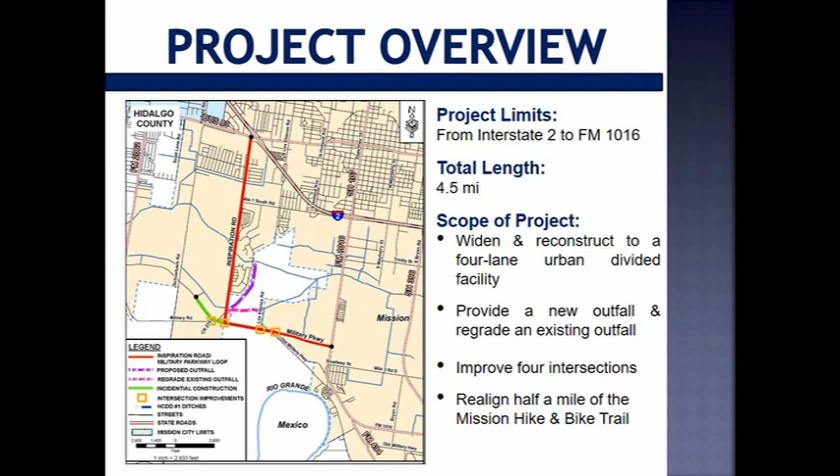Then east along Military Parkway to FM 1016, a length of 4.5 miles. The scope of the proposed project includes reconstructing and widening the existing roadway to provide a 4-lane divided urban facility, providing a new outfall and regrading an existing outfall to improve roadway drainage, improving 4 intersections, and realigning half a mile of the Mission hike and bike trail.

The existing conditions of the roadway cannot accommodate the current and projected traffic volumes. The roadway has design restrictions including bottlenecks due to varying lane and right-of-way widths, a lack of adequate turning bays to accommodate vehicles turning into existing residences and businesses, and tight turning movements at intersections.

The roadway contains gaps in the local transportation network. Inspiration Road from Mile 3 North Road south to I-2, US 83, has been reconstructed to provide a continuous north-south 4-lane corridor, and the Inspiration Road I-2 intersection was renovated to improve mobility. The proposed project would complete this vital north-south corridor within the city of Mission.

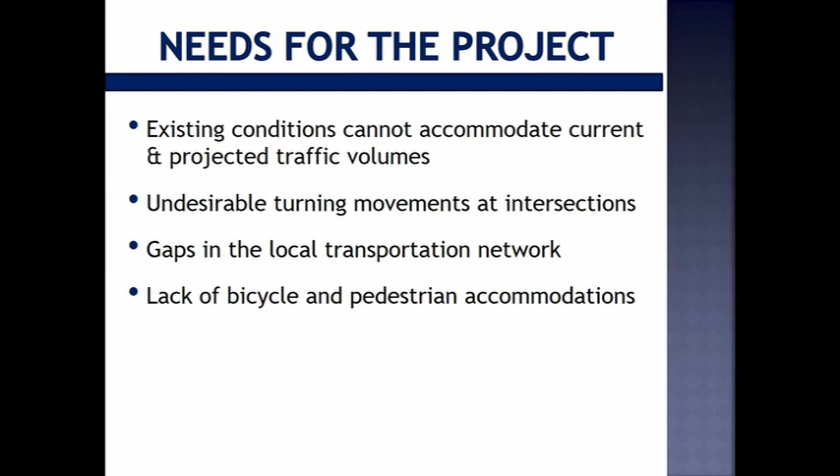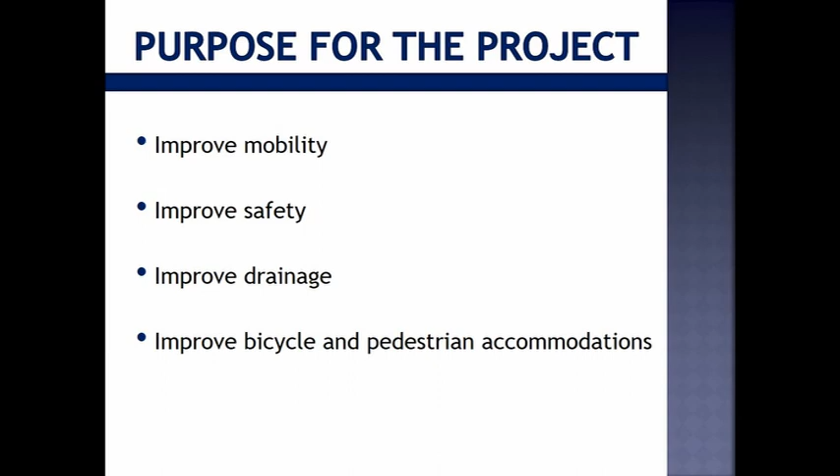Despite the presence of city parks, residences, and a hike and bike trail, the roadway does not provide pedestrian or bicycle accommodations. Bicyclists were observed on Inspiration Road during field surveys. The purpose of the proposed project is to improve mobility, safety, drainage, and to enhance bicycle and pedestrian transportation.

The increase in population and ongoing development have resulted in high traffic volumes in the project area. The traffic data is based on the average daily traffic, ADT, for the years 2020 and 2040, and divided into sections as follows. For the section of Inspiration Road between I-2 and 1 Mile South Road, the average daily traffic for the year 2020 is projected to be at

12,017 vehicles and 35,286 in 2040. Between 1 Mile South Road and Military Parkway, the average daily traffic is projected to be 1,108 vehicles in 2020 and 5,207 in 2040.

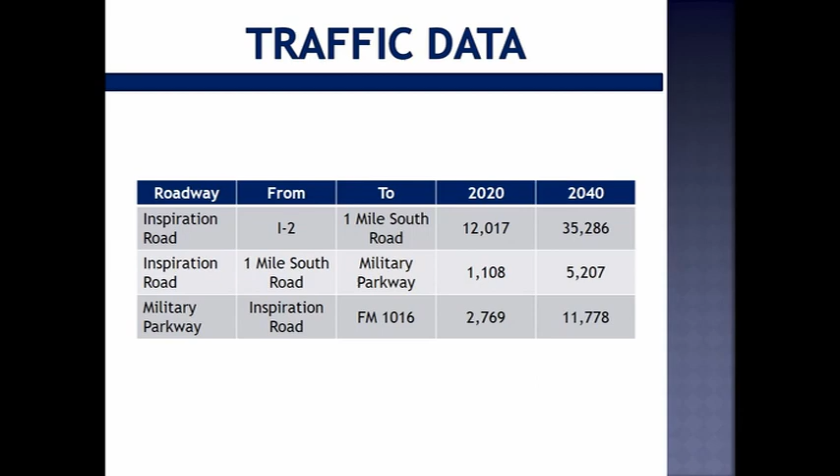And for the section of Military Parkway between Inspiration Road and FM 1016, the average daily traffic is projected to be 2,769 vehicles in 2020 and 11,778 vehicles in 2040. Two alternatives were studied and considered for this project: the no-build and the build alternative.

Under the no-build alternative, the existing roadway would not be widened or reconstructed. The existing conditions of the roadway would remain, and no improvements would be made to intersections or drainage. The no-build alternative is not recommended because it would not meet the need and purpose of the project. However, it is carried forward as a baseline.

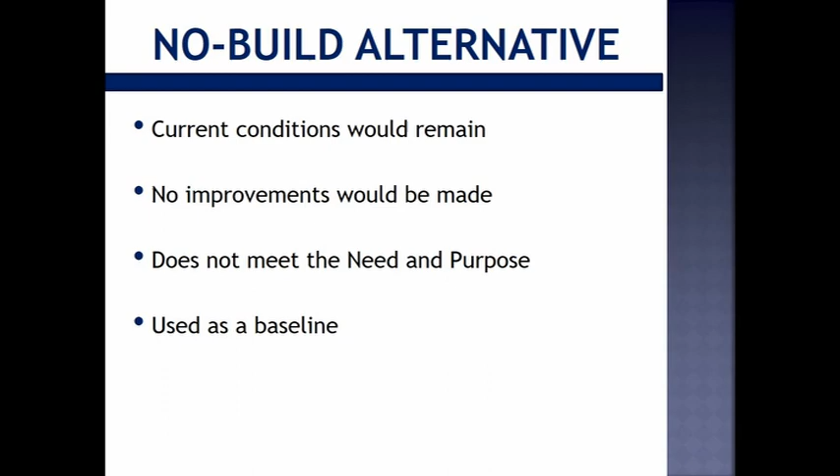Under the build alternative, the existing roadway would be widened and reconstructed to 4 travel lanes, a continuous left turn lane, shoulders or a shared use lane, and sidewalks. A storm drain system would be installed along with an outfall to drain storm water runoff from the roadway. 3 existing intersections would be realigned along Military Parkway, and the Los Ébanos Road intersection would be improved.

This alternative would require a total of 39 acres of new right-of-way. 7.7 acres are along Inspiration Road. 9.6 acres are along Military Parkway. 19.7 acres are for the new outfall, and 2 acres for County Road 2791 intersection realignment.

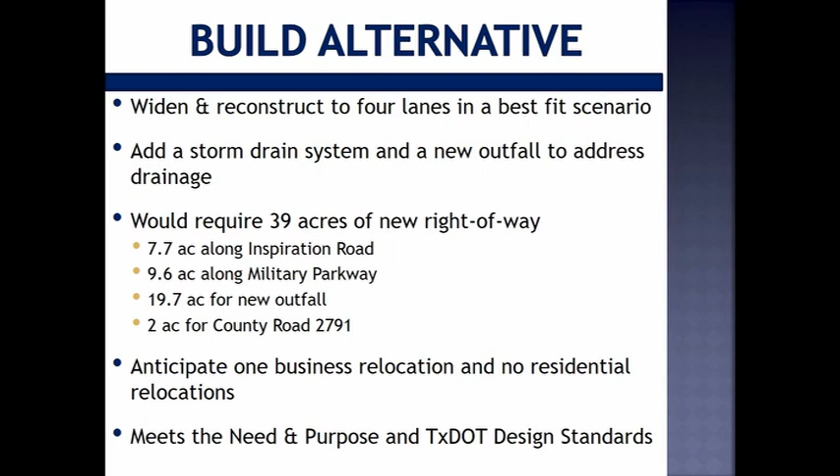It is anticipated that 1 business relocation would be required. No residential relocations are anticipated. This alternative would meet the need and purpose of the proposed project and would meet or exceed current TxDOT design standards.

Along Inspiration Road, the existing travel lane configurations are variable, as shown on the screen. Most of Inspiration Road is a 2-lane rural roadway consisting of 2, 12 to 14 foot wide travel lanes and intermittent 8-foot wide shoulders within a varying 60 to 140 foot wide right-of-way. There are areas where the roadway is wider to provide turning lanes for vehicles entering subdivisions or the Rio Grande Valley State Cemetery. Drainage is currently handled by roadside ditches.

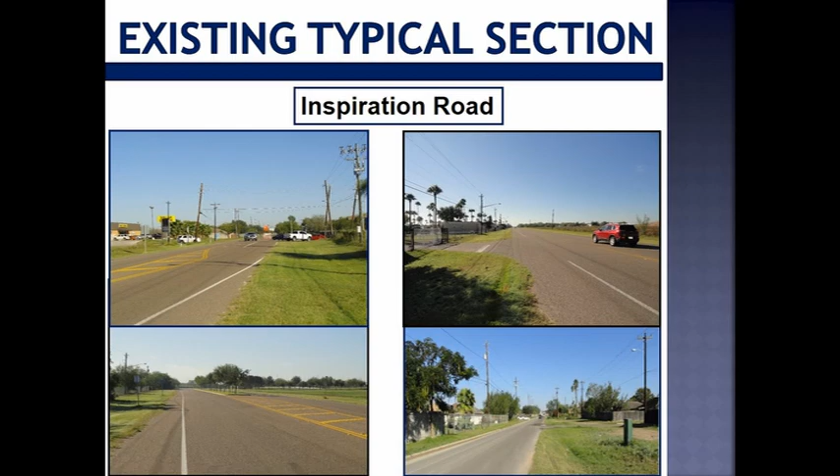Military Parkway is an existing 24-foot wide rural roadway with a varying 80 to 150 foot wide right-of-way. There are 8-foot wide shoulders from Los Ébanos Road east to FM 1016.

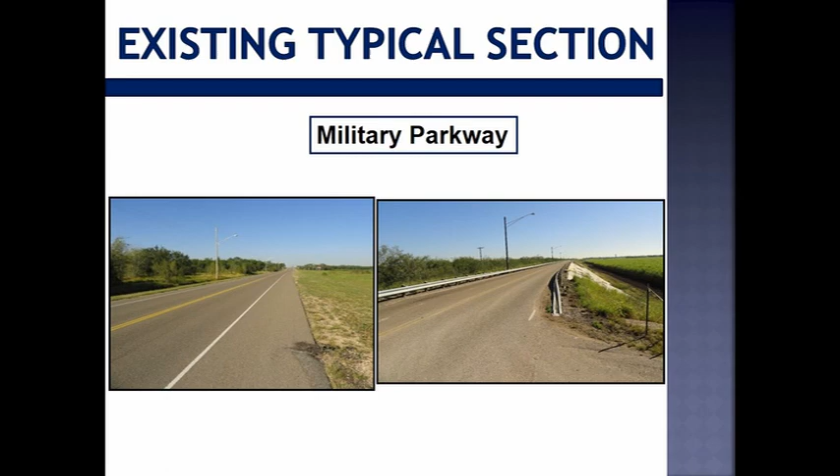Approximately 0.7 miles of this section of the project is located along the existing International Boundary and Water Commission, or IBWC, levee. Drainage is currently handled by roadside ditches. Inspiration Road would be widened to a 4-lane urban facility within a proposed variable 80 to 200 foot wide right-of-way.

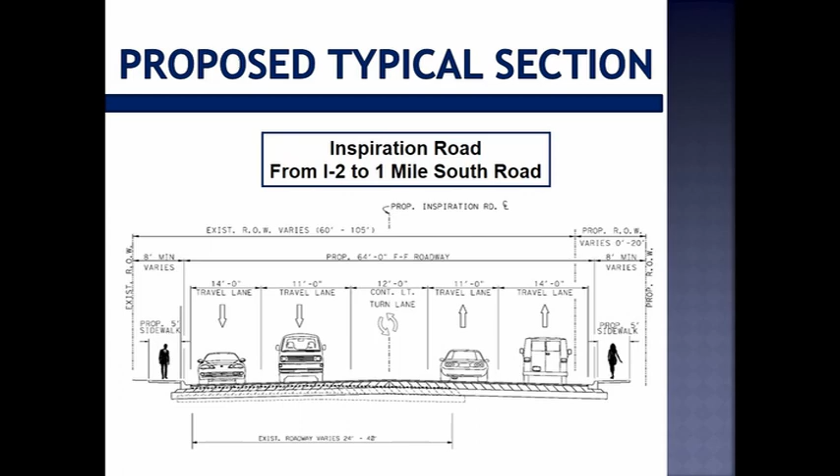The section from I-2 to just south of 1 Mile South Road would consist of 2 11-foot wide travel lanes, 2 14-foot wide shared use lanes for bicycles and automobiles, a 12-foot wide continuous left turn lane, and 5-foot wide sidewalks on both sides of the roadway within a proposed 80-foot wide right-of-way. Inspiration Road from 1 Mile South Road to Carioca Drive, southeast of Bentsen Palm Community Park, is being proposed as a 4-lane urban roadway.

This section of roadway would consist of 4 12-foot wide travel lanes, 2 10-foot wide shoulders, a 16-foot wide continuous left turn lane, and 6-foot wide sidewalks on both sides of the roadway within a 120-foot wide proposed right-of-way. A portion of Inspiration Road from 0.3 miles north of Military Parkway to Military Parkway also includes a 16-foot wide left turn lane.

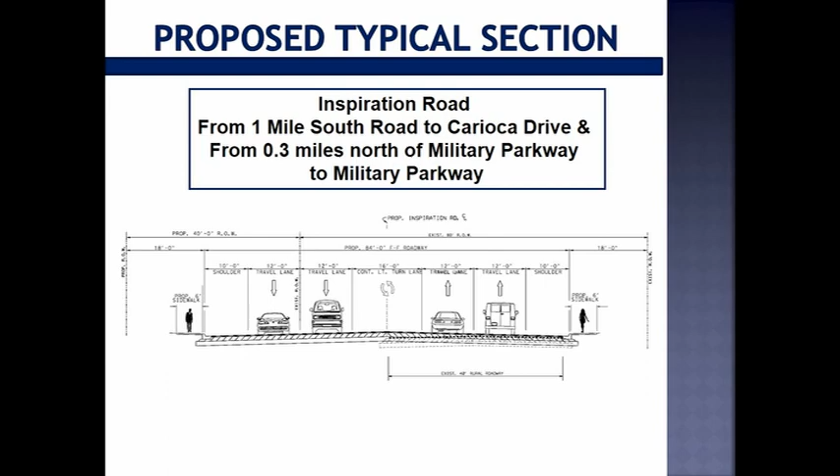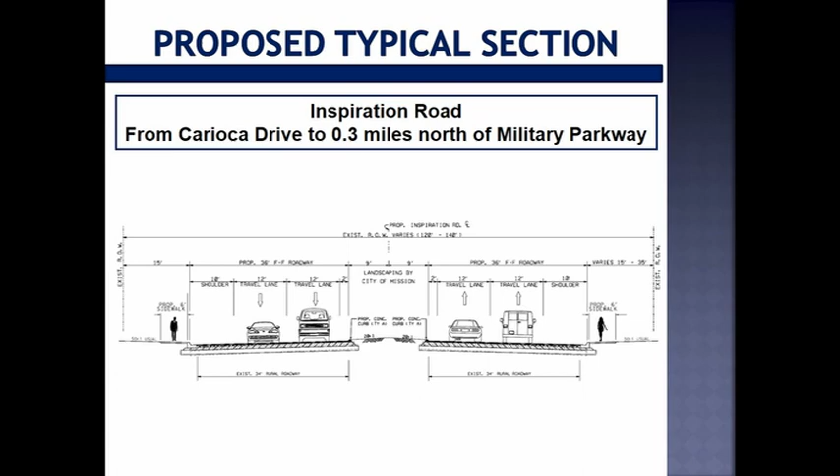The section of Inspiration Road from Carioca Drive to 0.3 miles north of Military Parkway would be a 4-lane urban roadway consisting of 4 12-foot wide travel lanes, 2 10-foot wide shoulders, an 18-foot wide raised median, and 6-foot wide sidewalks on both sides of the roadway, all within a proposed 120 to 140 foot wide right-of-way.

Military Parkway on the IBWC levee from Inspiration Road east for 3,500 feet, or 0.7 miles, would be widened along the north side to an 84-foot wide roadway consisting of 4 12-foot wide travel lanes, 2 10-foot wide shoulders, a 16-foot wide continuous left turn lane, and 6-foot wide sidewalks on both sides of the roadway, all within a proposed 180 to 200 foot wide right-of-way.

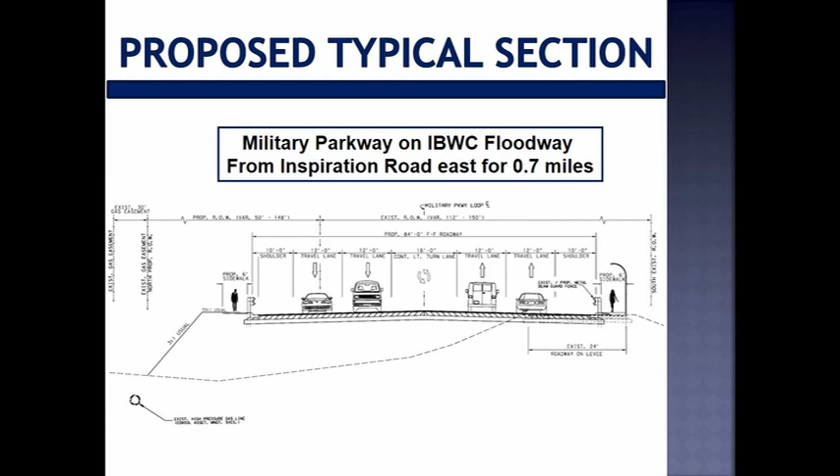An existing metal beam guard fence would be placed on both sides of the roadway. On Military Parkway from the end of the IBWC levee east to FM 1016, the existing roadway would be widened to the north to an 84-foot wide facility consisting of 4 12-foot wide travel lanes, 2 10-foot wide shoulders, a 16-foot wide continuous left turn lane, and 6-foot wide sidewalks on both sides of the roadway, all within a proposed 120-foot wide right-of-way.

Approximately 0.3 miles of incidental construction within existing right-of-way would be required on Military Parkway west of Inspiration Road for a roadway transition. Drainage for the entire project would be provided by an underground storm drain system. The project is being designed for 45 miles per hour.

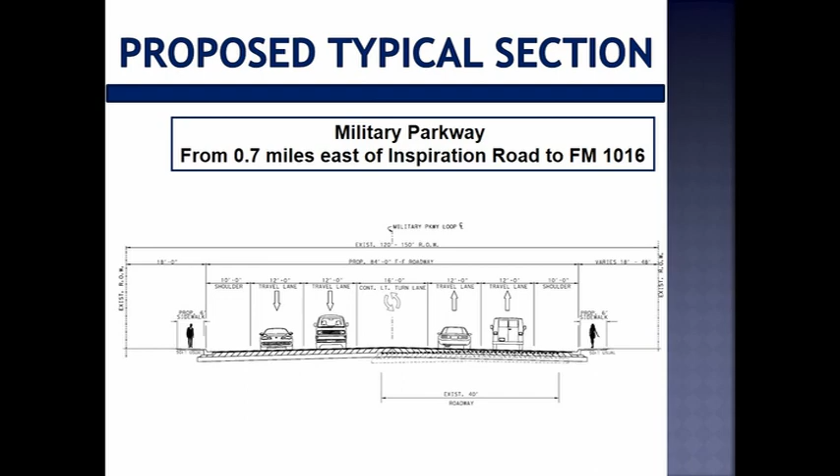The proposed project would include construction of an outfall along new location to drain storm water runoff from the roadway within the project limits. The outfall would be located approximately 0.3 miles northeast of the Inspiration Road Military Parkway intersection and extend north for approximately 0.8 miles to connect to the existing Mission Inlet. The proposed outfall would be 170 feet wide within a proposed 200-foot wide right-of-way.

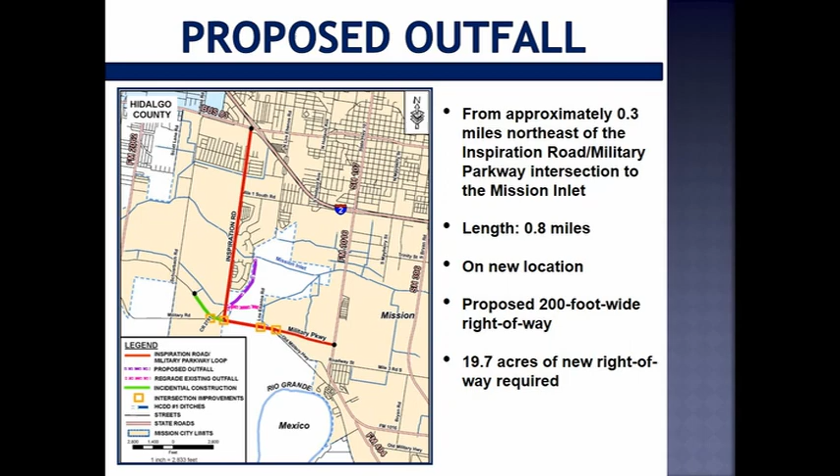A total of 19.7 acres of new right-of-way would be required. An existing drainage ditch located approximately 0.2 of a mile north of Military Parkway would be regraded from Inspiration Road east to Los Ebanos Road, a length of 0.4 miles. The proposed improvements would include the realignment of 3 intersections to improve safety.

The intersection of Inspiration Road and Military Parkway would be realigned to provide a direct north-south T intersection, eliminating the existing curves. The existing curved section of Inspiration Road would be removed. The proposed right-of-way for this intersection improvement is part of the total proposed right-of-way for Inspiration Road, 7.7 acres.

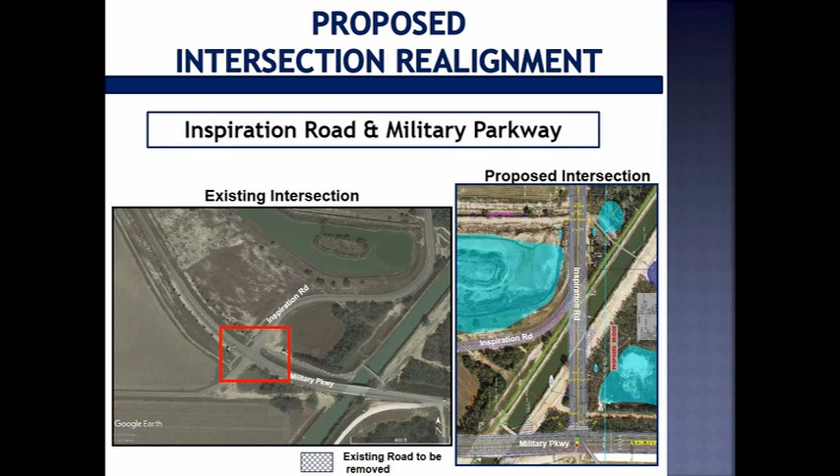County Road 2791 is located south of the Inspiration Road and Military Parkway intersection and intersects with Military Parkway. The intersection would be relocated approximately 0.1 miles west of its current location. The curve would be eliminated to provide a safer north-south T intersection. Approximately 2 acres of new right-of-way would be required for the realignment of this intersection.

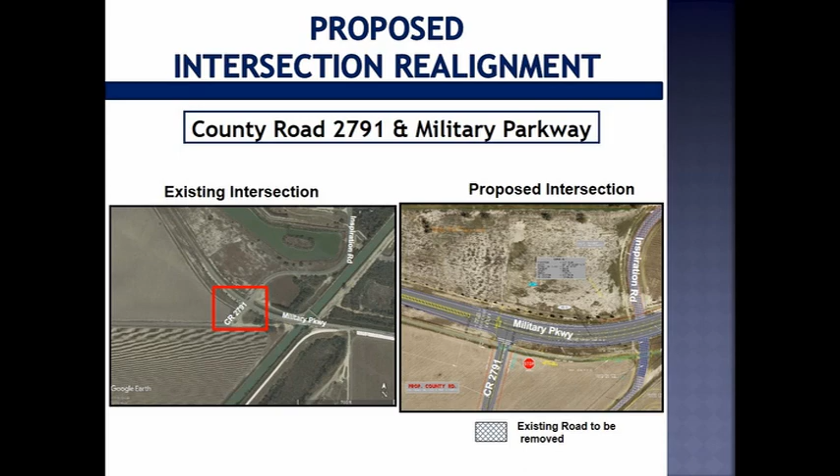The intersection at Old Military Highway and Military Parkway, which is located at the end of the IBWC levee, would be realigned approximately 0.3 miles east of its current location. This realignment would eliminate the sharp turn to Old Military Highway and create a T intersection to improve sight distance. An existing 80-foot wide right-of-way is available for Old Military Highway. Therefore, no new right-of-way would be required for this realignment.

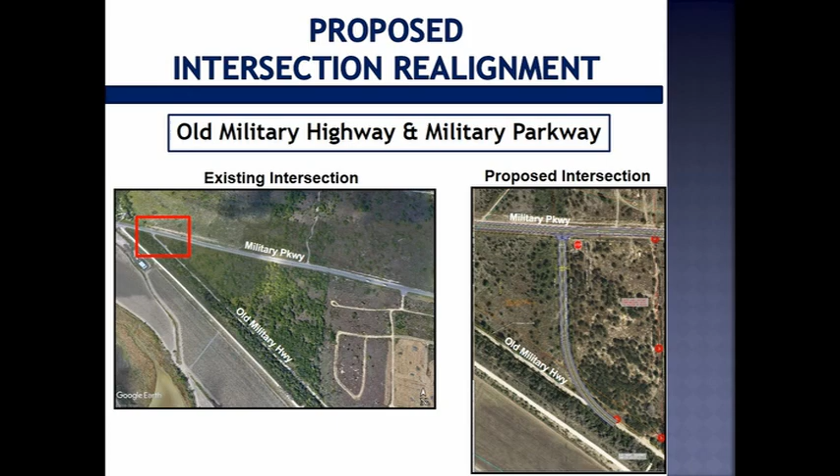The intersection at Los Ebanos Road and Military Parkway would be widened at its current location within a proposed 206-foot wide right-of-way. An existing 40-foot wide right-of-way is available along Los Ebanos Road. However, new right-of-way would be required for this improvement.

Additional right-of-way is needed to accommodate a 500-foot long roadway transition and underground drainage pipes. The proposed right-of-way for this intersection improvement is part of the total proposed right-of-way for Military Parkway, 9.6 acres.

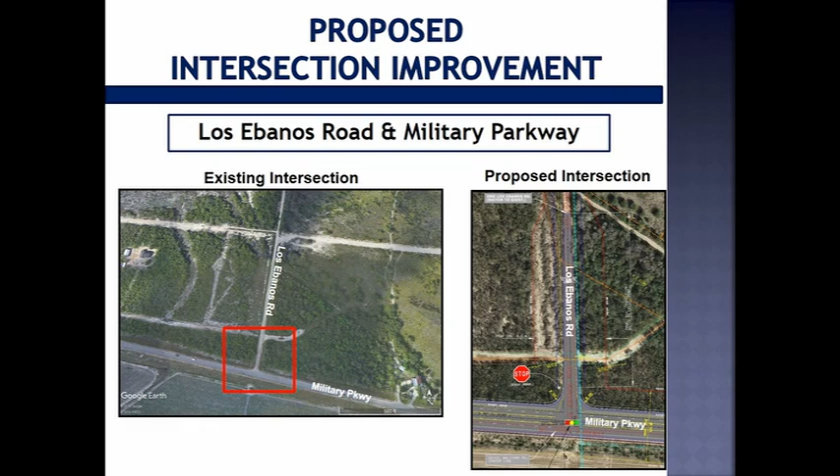Signal warrants will be conducted at the intersections of South Mile 1 Road, Inspiration Road, and FM 1016 to determine if traffic signals are needed.

An environmental study will be conducted for this project and will comply with the National Environmental Policy Act. In addition, the environmental review, consultation, and other actions required by applicable federal environmental laws for this project will be carried out by TxDOT pursuant to 23 United States Code 327. This also includes a Memorandum of Understanding dated December 9th, 2019, and executed by FHWA and TxDOT.

The proposed project would impact 3 park or historical properties in the project area: Bentsen Palm Community Park, City of Mission Hike and Bike Trail, and the IBWC Levee.

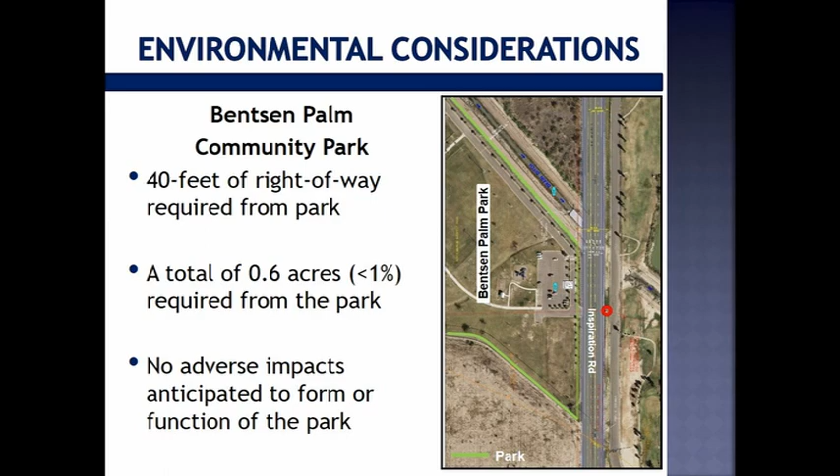Preliminary coordination with the City of Mission has occurred and is in favor of the proposed project and potential relocation of the palm trees and the trail.

The City of Mission Hike and Bike Trail extends from the Bentsen Rio Grande Valley State Park to FM 1016 near Trinity Street, a length of approximately 5 miles.

The proposed project would include the realignment of approximately half a mile of trail northeast of the existing Inspiration Road Military Parkway intersection.

The existing pedestrian bridge at the Mission Main Canal would be relocated approximately 0.2 miles to the northeast of its current location.

2 pedestrian tunnels would be constructed underneath 2 proposed bridge crossings. The tunnels would allow pedestrian traffic to cross under the roadway safely without having to interact with the cross traffic.

Approximately 0.3 miles of trail would be moved from its current location on the east side of the canal to the west side. No new right-of-way would be required.

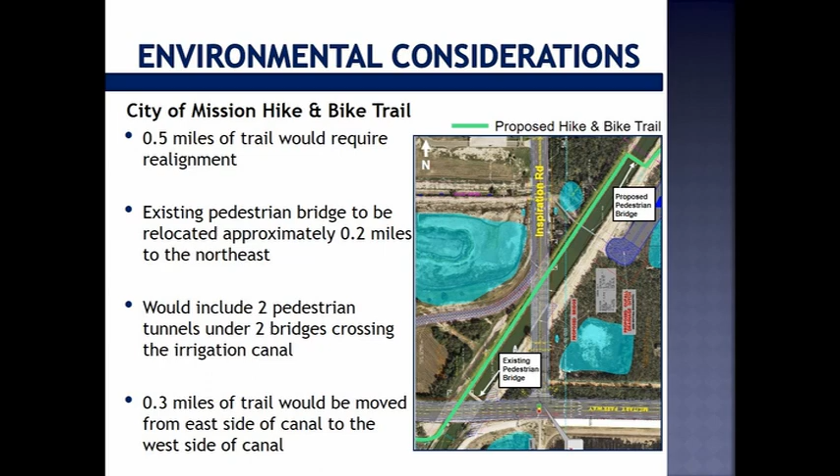Temporary impacts to the hike and bike trail are anticipated. However, form and function would be restored upon completion of the project. These impacts are anticipated to last 1 to 1.5 years. A detour would be provided to ensure use of the trail can continue throughout the construction.

Approximately 0.7 miles of the project is located along the IBWC levees. The roadway would be widened along the north side of Military Parkway and would not change the elevation of the levee. An IBWC permit would be required.

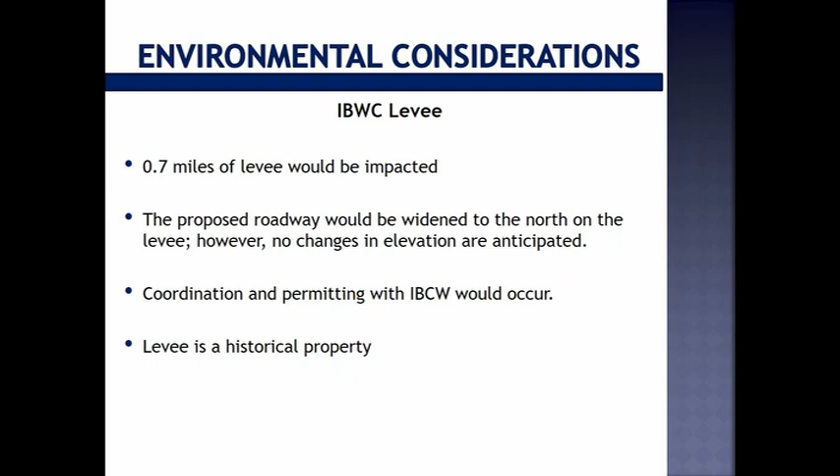The levee is considered a historic property, therefore triggers the 4(f) and Chapter 26 requirement. Preliminary coordination with IBWC has occurred, and they have no objections to the proposed project. A preliminary review of the National Wetlands Inventory identified 3 drainage ditches and 6 wetland areas within the project limits.

Coordination with the United States Army Corps of Engineers, USACE, and wetland delineations will be conducted to determine jurisdiction and potential impacts. I will now provide you with information on the right-of-way acquisition process to be followed by the acquiring agency, which will be the City of Mission with TxDOT oversight.

Property acquisitions will follow federal and state laws and policies. The Uniform Relocation Assistance and Real Property Acquisition Policies Act of 1970, known as the Uniform Act, is a federal law that is followed for appraisals, negotiations, and relocation of families and/or businesses.

The City of Mission will be acquiring the additional right-of-way from individual property owners and relocate any families or businesses affected by the project.

Independent fee appraisers will appraise each individual property needed as additional right-of-way. Each affected property owner will receive a certified letter from the appraiser requesting a meeting with him or her in order to inspect the property and provide them the opportunity to accompany them during a pre-appraisal inspection. They will also request permission to enter a property for inspection of improvements. The appraiser will determine the land value, improvement value, and damages to the remainder, if any, of the property to be acquired.

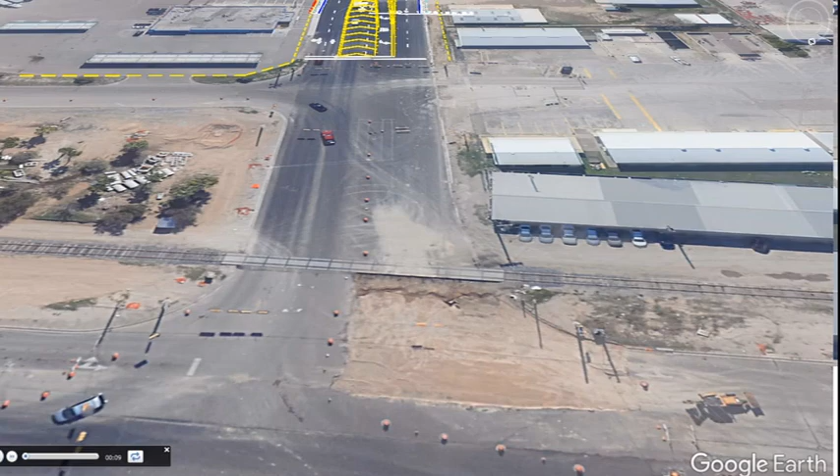At this time, we will show a flyover video of the project and give you more of a perspective and additional project details. The fly-through begins at the north end of Inspiration Road, just south of the expressway, and would continue south along Inspiration Road. We would match the existing roadway.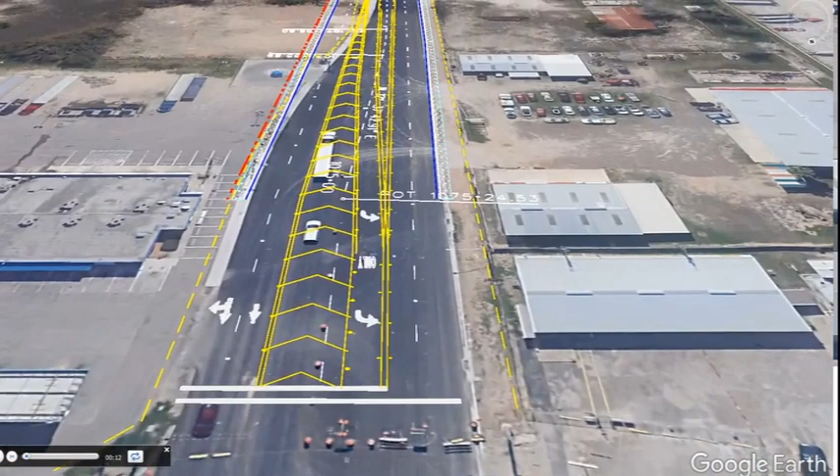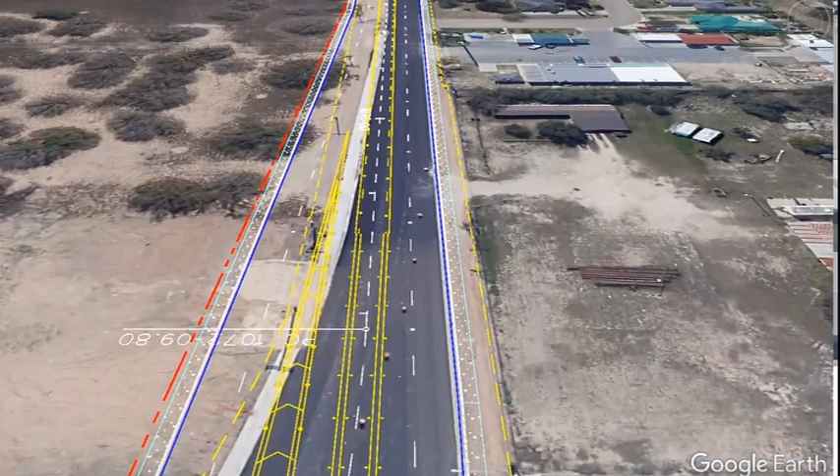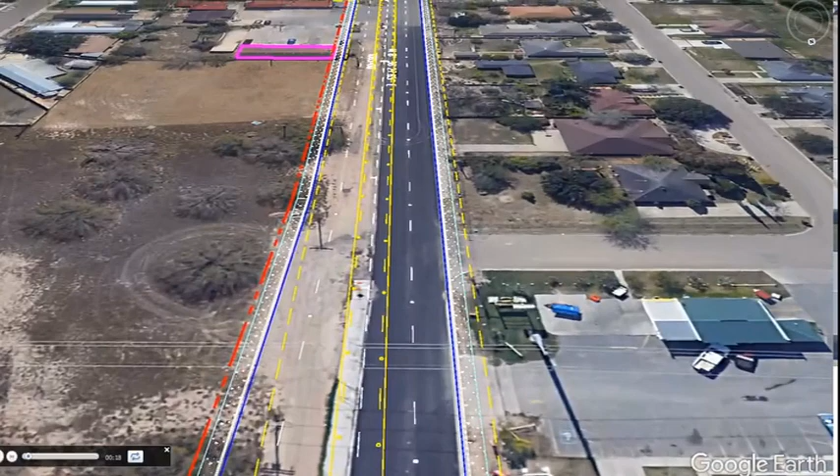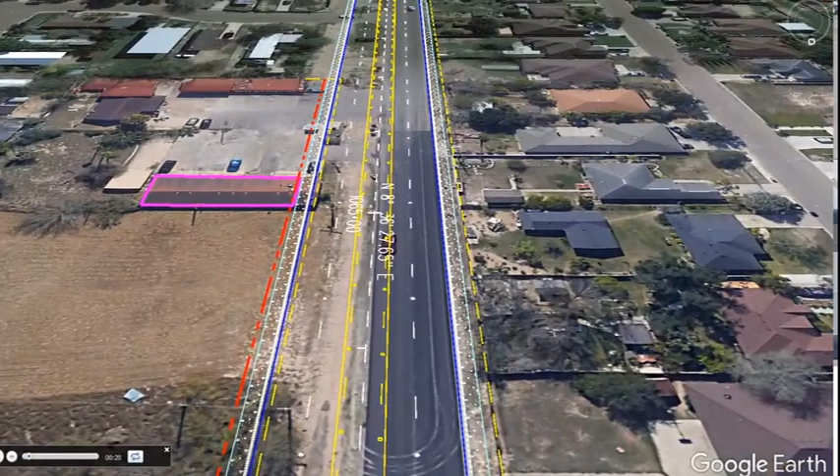The red dashed lines indicate proposed right-of-way, and the yellow lines are the existing right-of-way. The blue lines with spots on either side of the road are the proposed sidewalks. The proposed roadway then transitions to a proposed 64-foot curb and gutter section consisting of 4 lanes and a continuous left turn lane. The roadway would impact one business shown here on the left side of the screen.

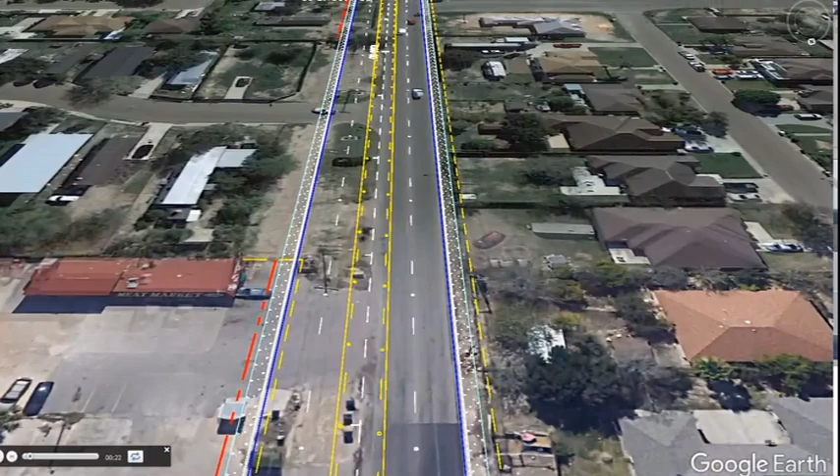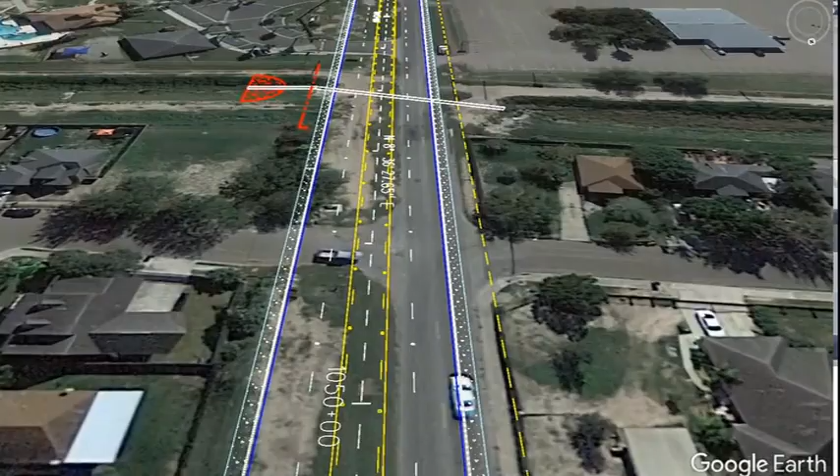Right-of-way would be acquired along the east side of the roadway, shown on the left side of the screen. We are now approaching outfall number 1, where the existing culvert would be extended. We continue with a 64-foot curb and gutter section to Mile 1 South.

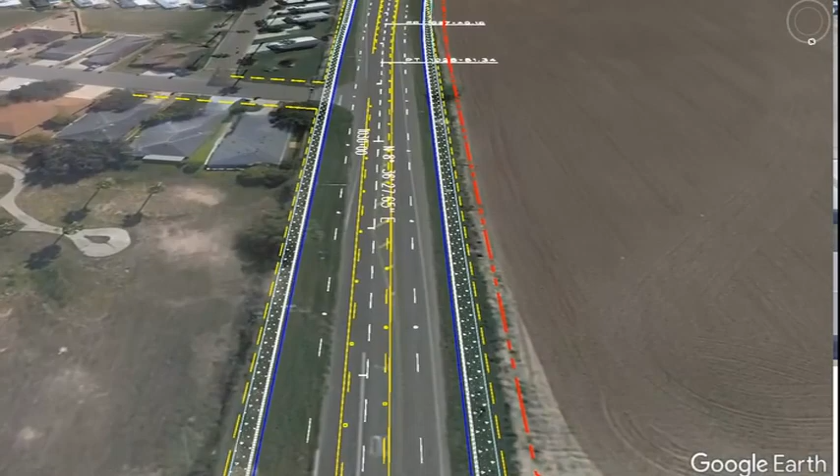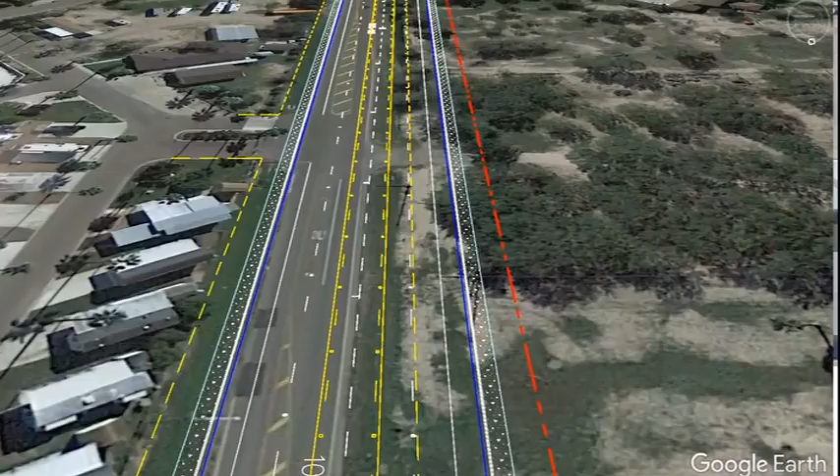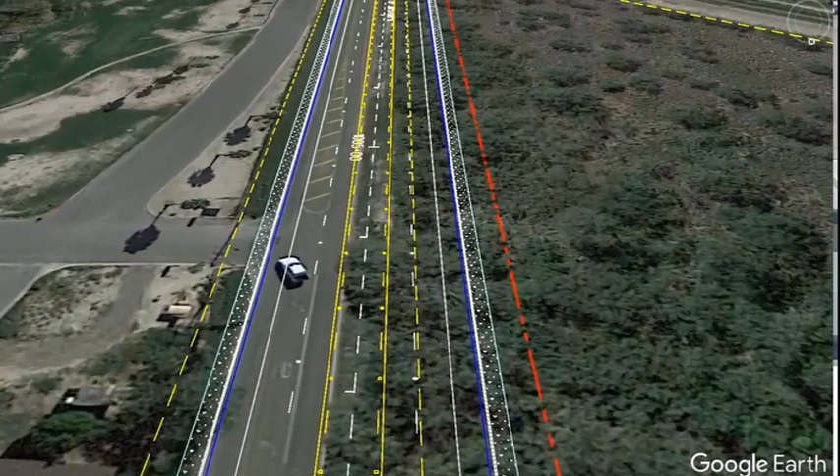South of Mile 1 South, the roadway widens from 64 feet to an 84-foot curb and gutter section. This section would add 10-foot shoulders on both sides of the roadway. Right-of-way would be acquired on the west side of the roadway, shown on the right side of the screen.

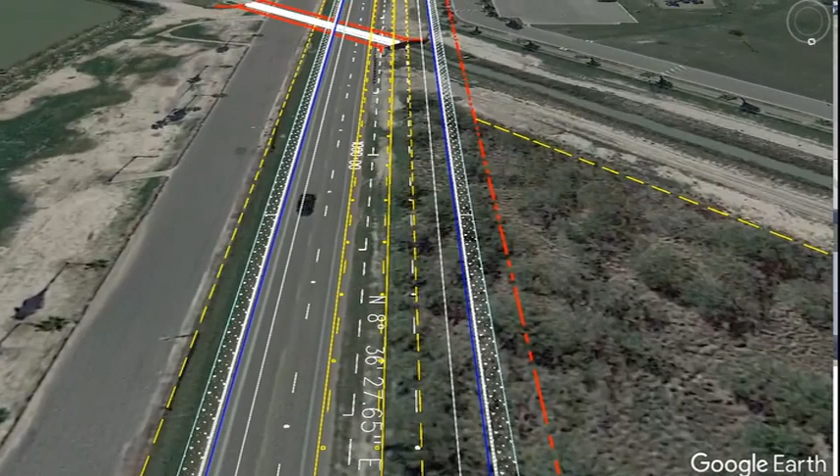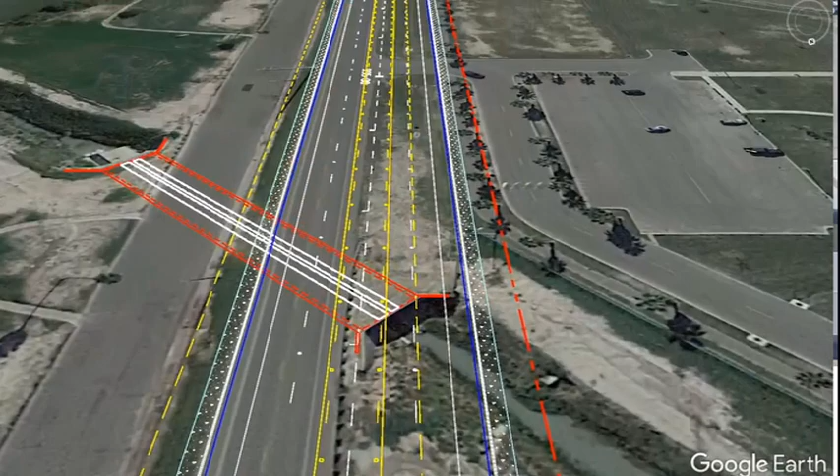As we continue south, we approach outfall number 2, where the existing drainage culverts would be extended. Proposed right-of-way would be required along Bentsen Palm Park, seen on the right side of the screen. The existing palm trees and walking trail might be impacted. Therefore, coordination with the City of Mission is in progress.

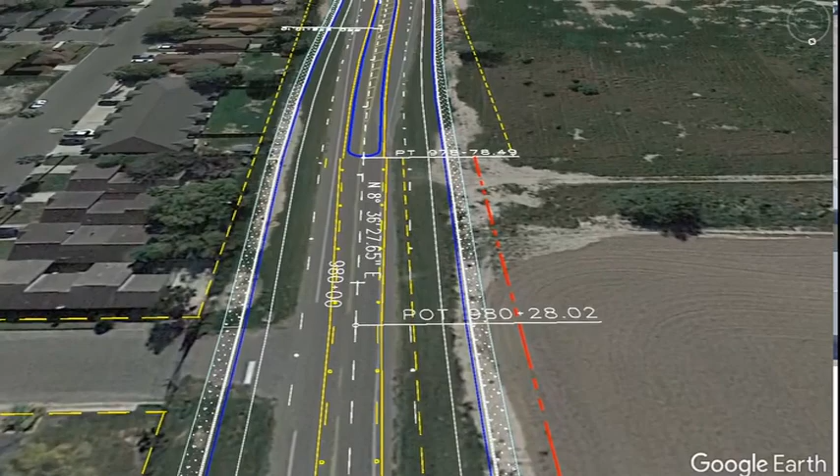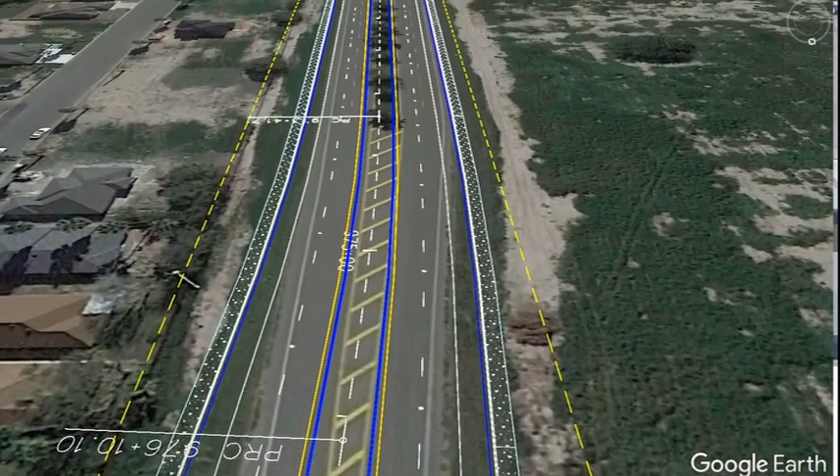The roadway section now transitions from the 84-foot section with a flush median to a raised median section. The existing raised median would remain. However, curb and gutter would be added. This section would be constructed within the existing right-of-way.

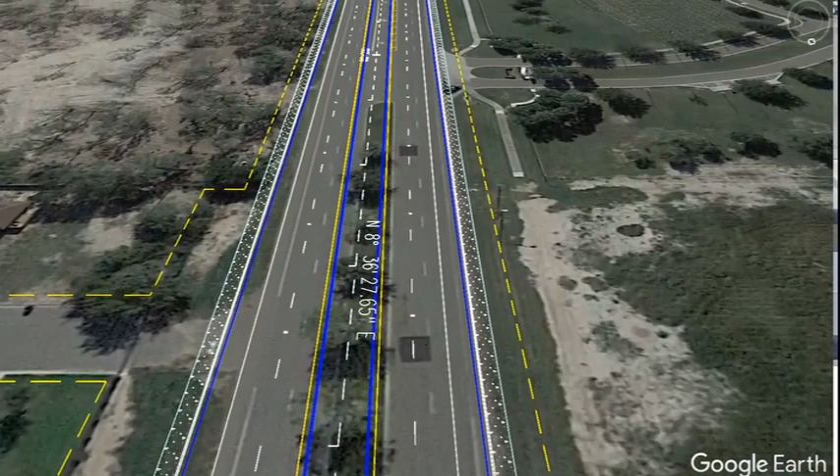On the right, you will see the Rio Grande Valley State Cemetery. No additional right-of-way would be required from the cemetery, and no impacts are anticipated. After the cemetery, the roadway transitions to a 72-foot curb and gutter section as the median is eliminated.

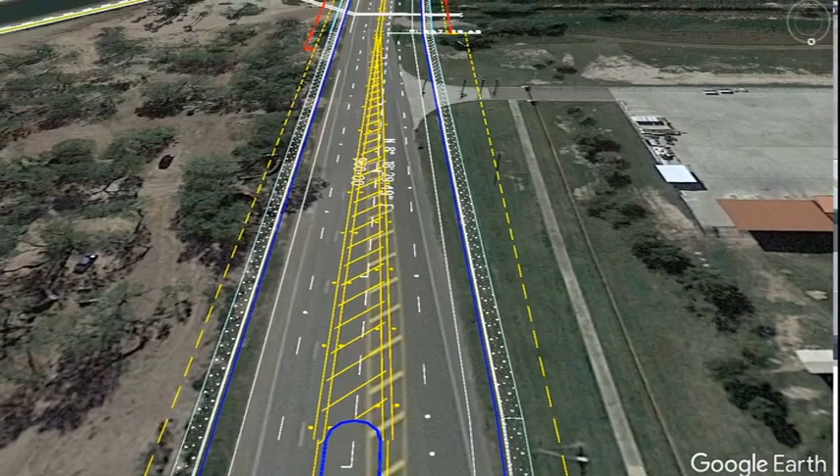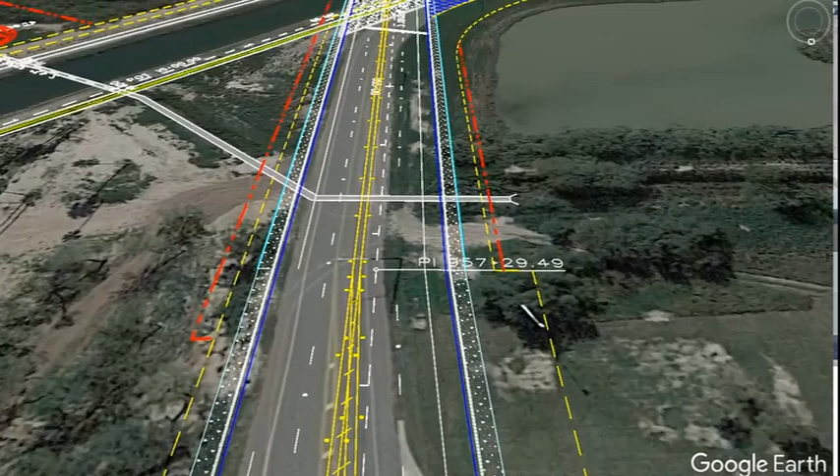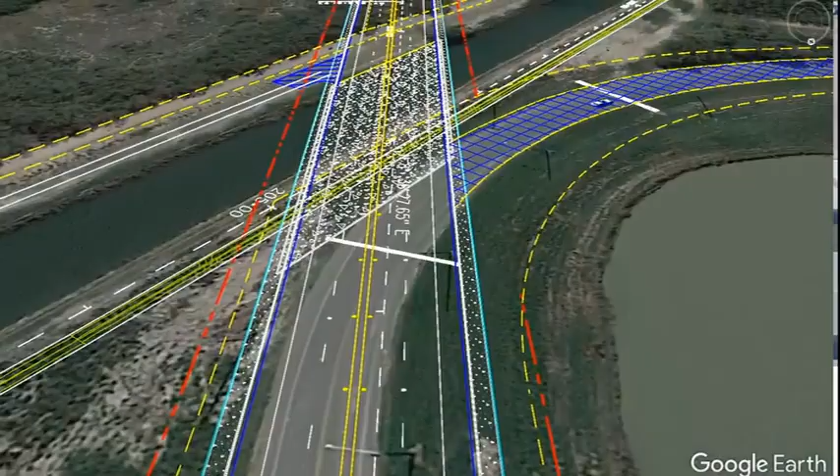At this point, a bridge would be constructed over the existing irrigation canal and intersect Military Parkway at a T. The existing Inspiration Road, which currently curves to the west, shown on the right side of the screen, would be removed.

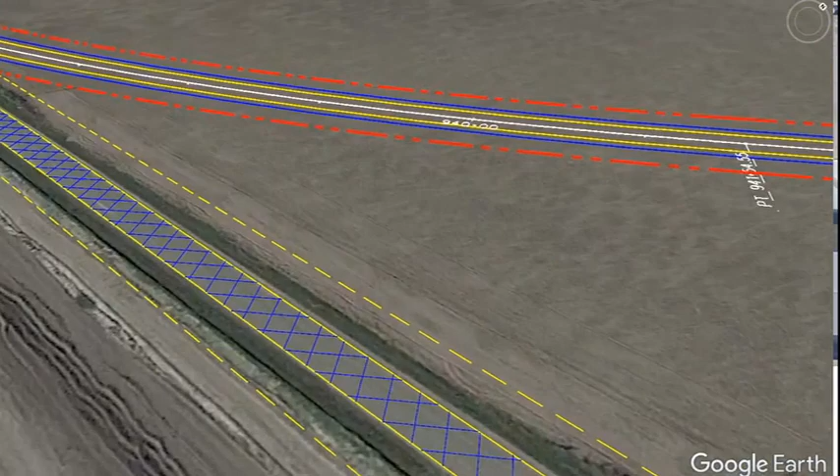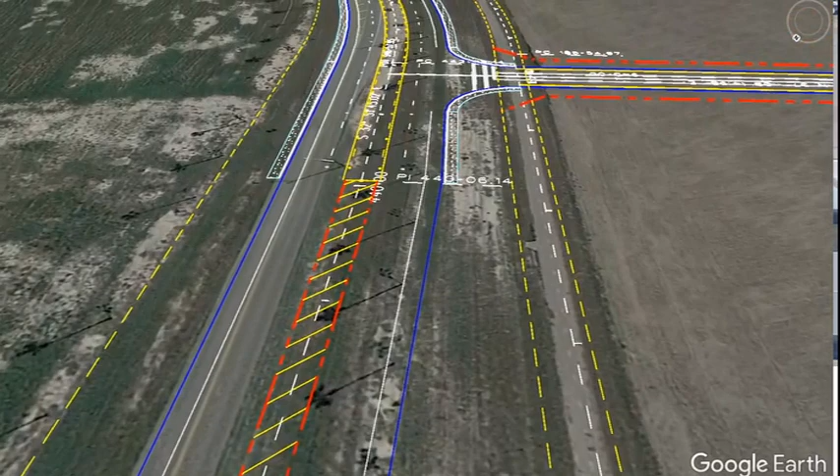The flight now takes us to the west end of Military Parkway, where the road would transition to match the existing roadway. To the right, you can see County Road 2791, which would be realigned to a T intersection with Military Parkway to improve safety.

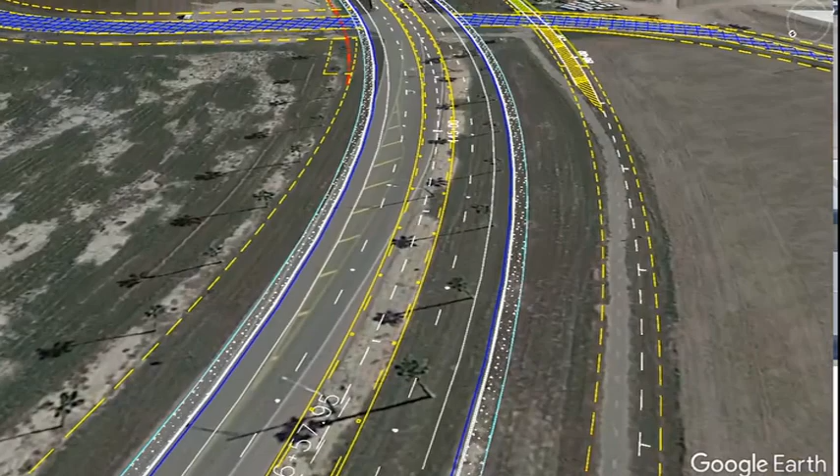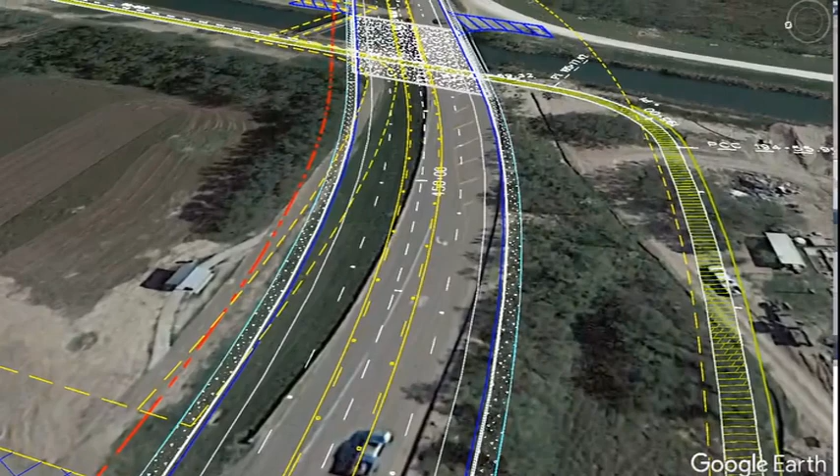We now pass the current Inspiration Road Military Parkway intersection. The blue crosshatch lines on Inspiration Road indicate the section to be removed. The existing bridge along Military Parkway would be removed and replaced with a new bridge over the existing irrigation canal. You can see the new Inspiration Road Military Parkway intersection just east of the proposed bridge at the top of your screen.

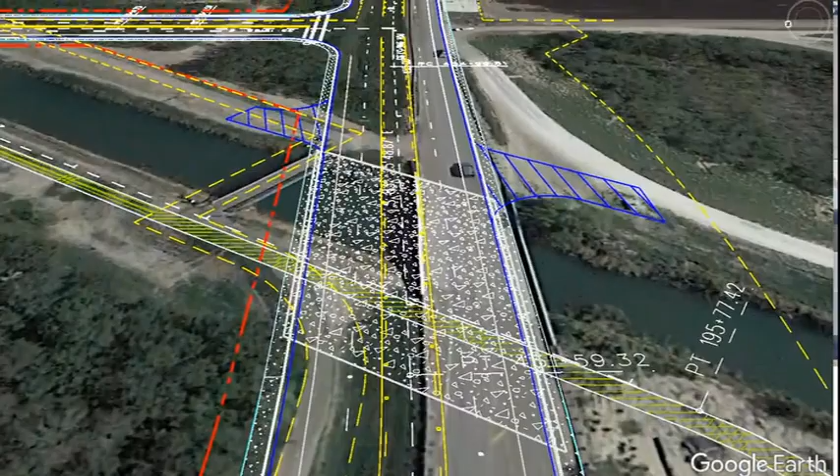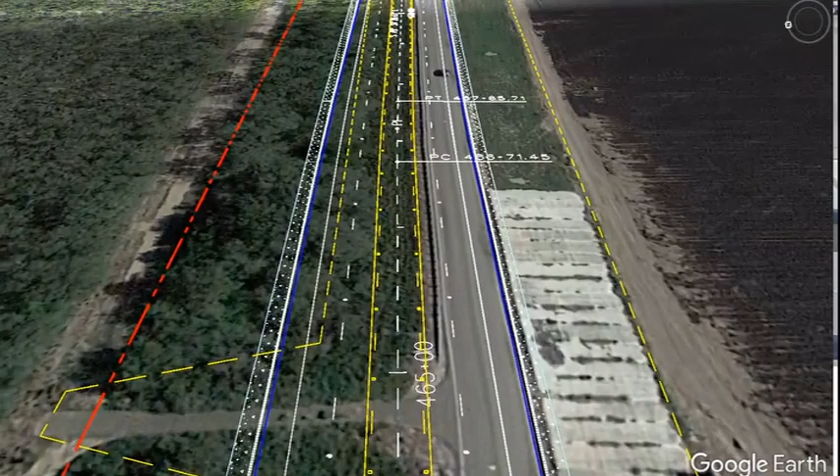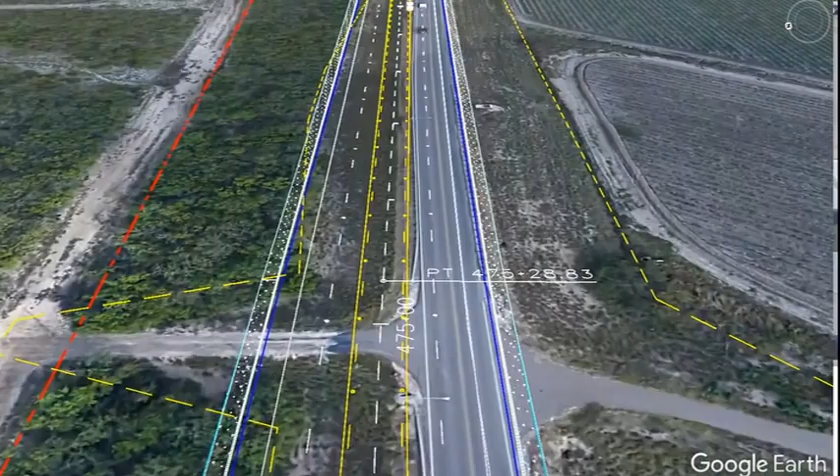The existing Military Parkway currently runs on top of the existing IBWC levee. The roadway would be reconstructed to an 84-foot curb and gutter section on top of the levee towards the north. Right-of-way would be acquired on the north side of the levee. No new construction would occur south of the levee.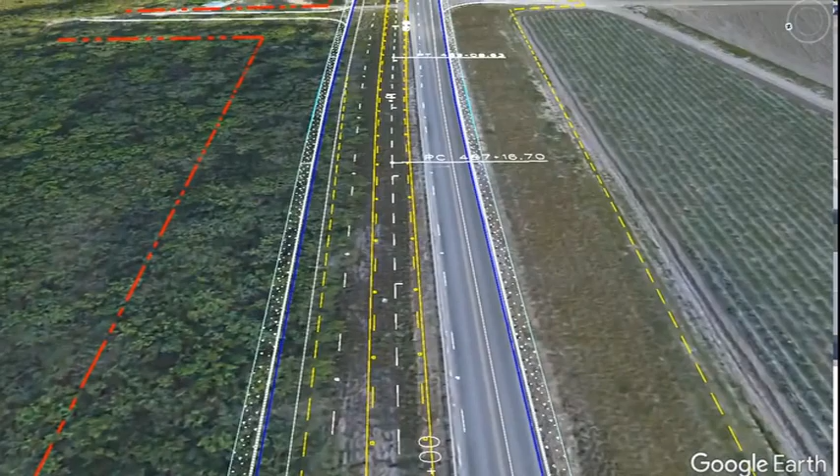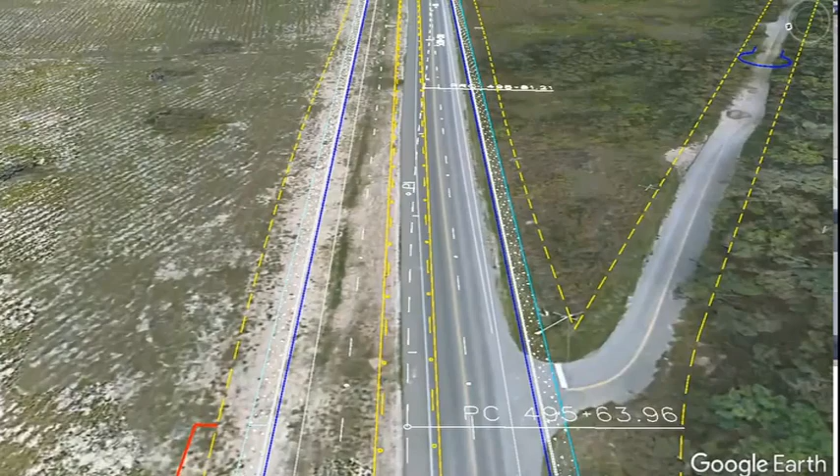Los Ébanos Road would be constructed to transition to Military Parkway and connect at a T intersection. The roadway comes off the levee and the levee continues to the south. At this point, we are passing Old Military Parkway Road on the right side of the screen. Old Military Parkway Road would be realigned to connect at a T intersection with Military Parkway to improve safety.

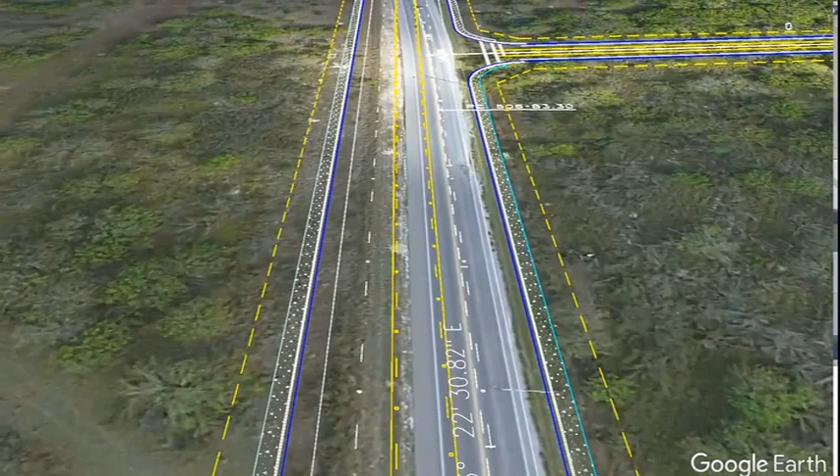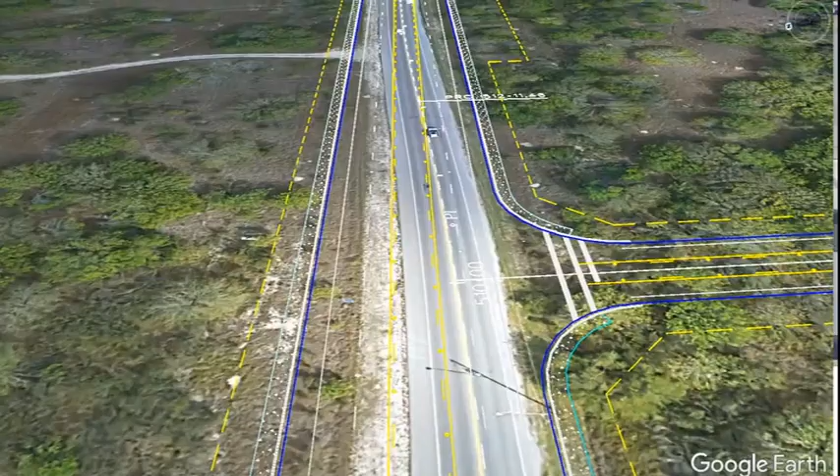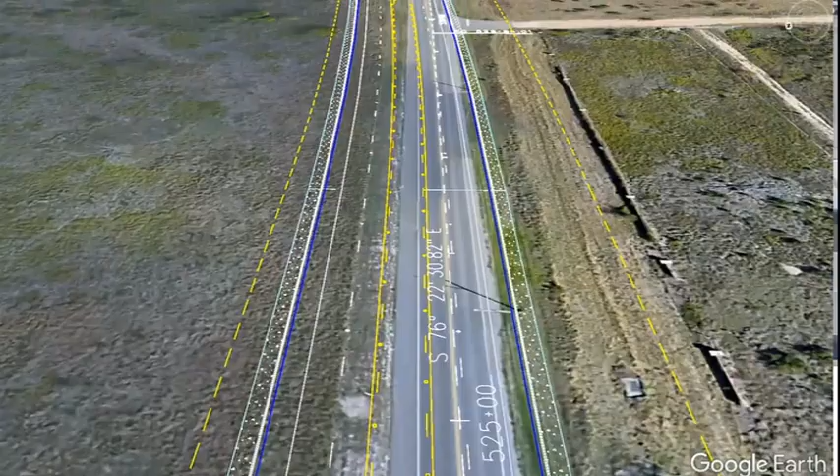Here is the realigned section of Old Military Parkway Road. As you can see, it tees into Military Parkway. The proposed Military Parkway would be constructed within the existing right-of-way all the way to FM 1016. And now we approach the end of the project limits where Military Parkway intersects FM 1016.